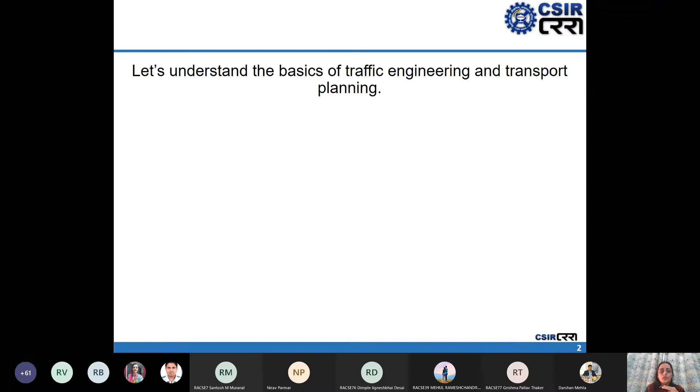When we say traffic engineering, we are talking more about roads, vehicles, how they move, geometry, and how it can be made safe, etc. When we talk about transport planning, we are talking at a larger zone, maybe at a city level, maybe an area level - what kind of planning should we do so that overall we move towards sustainability, we move towards safer commuting of people, persons, rather than vehicles.

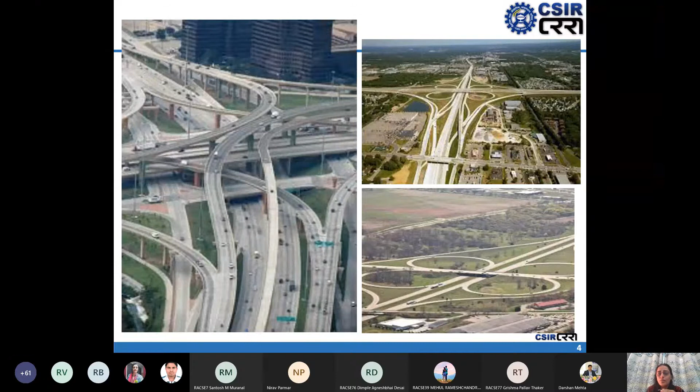But from the perspective of transportation planning, even by adding this much space, they have not resolved the problem. Still, these countries are having jams, traffic jams, congestion, and pollution. What we have here, they are also having similar problems. So definitely, space is not the constraint.

So sometimes we believe that the way we, being in India, park our cars or park any kind of vehicles here and there, that is the problem.

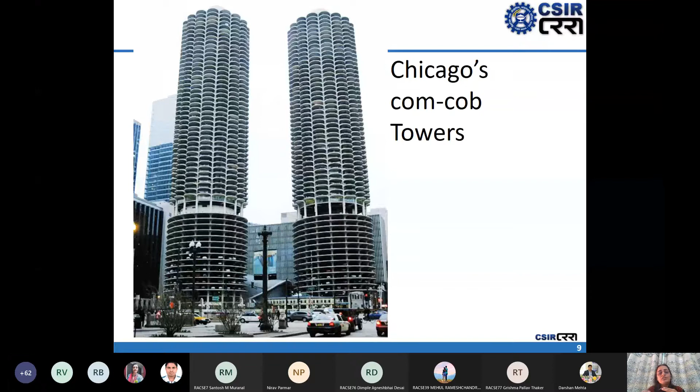Now just imagine if every person starts using space equivalent to a car. Suppose I am walking and I start consuming space equivalent to a car - do you think we have enough space for every person here? In Delhi, in India, or anywhere, whichever city we think of, just imagine how many people are using cars as of now. When we look at the road, we may see too many cars here and there, and we start believing that almost everyone has a car. But just try to consider it.

Just check out the data - being in this research field, we rely a lot on data. Half of the households do not own any vehicle, meaning they don't even own a two-wheeler. So only about half own, say, a car. Now even in a household that owns a car - and household means a family of typically 4 to 5 people - out of these 4 or 5, usually only one person is using that car, maybe for office, job, or work purposes. But the remaining 4 must be using some other modes.

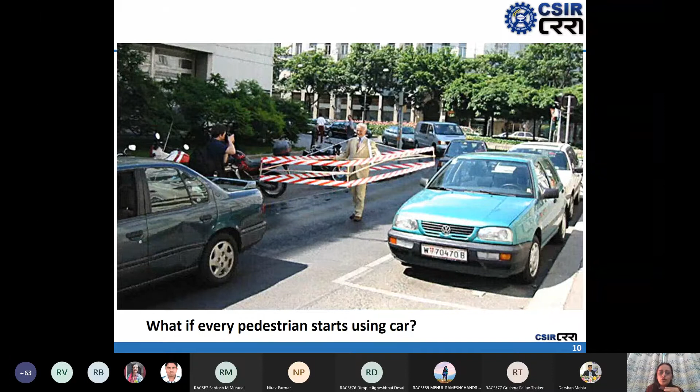So we need to understand, if everyone starts consuming this much space, what will happen? In that case, we will not have space for anything else. As of now, in Delhi, nearly one-third of the total area is basically utilized for vehicles - and that includes both roads and parking.

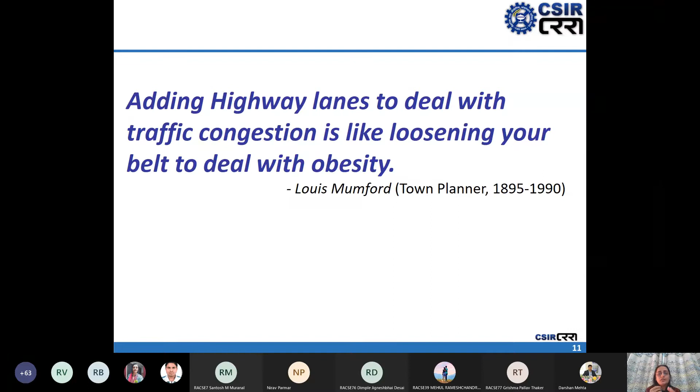So if I keep adding more and more space, since the number of cars keeps increasing every day, we may think we need to widen our roads. But if we keep widening our roads, what is the limit beyond which we cannot widen further? How much space would we like to give just for roads? If we keep adding space, accommodating more and more vehicles, it will cost a lot. We may have to reduce space from public spaces - parks, institutes, religious places - and it may even go up to encroaching on our houses, forcing us to build smaller houses. So we need to understand what the critical limit can be for allowing space to vehicles.

So what could be the sustainable solution? As of now, why is everyone willing to have a car? Because it is the most comfortable way of commuting from one place to another. But of course, everyone has to move, and they will keep moving.

At the same time, it improves the congestion level drastically, and it becomes more safe.

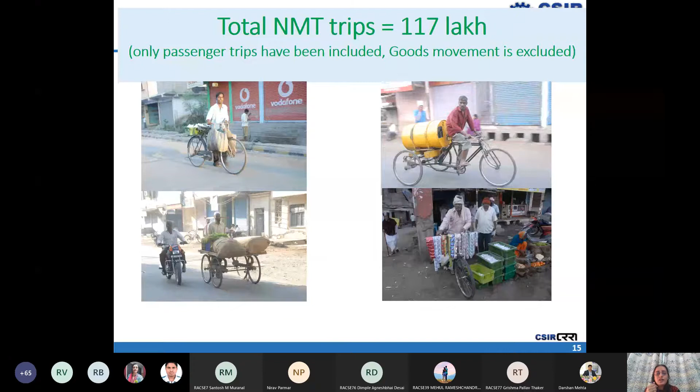If I talk about Delhi, since I have more data on it, pre-COVID, 90 lakh walking trips were made in Delhi, 11 lakh cycle trips were made, and Delhi also has cycle rickshaws, another non-motorized transport, accounting for nearly 17 lakh trips. If you combine all three together and compare with motorized modes like car, two-wheeler, bus and metro, these sustainable modes make up 50% of the total trips.

Yet what remains in the news, or in the mind of every planner, every engineer, every person involved in decision making in PWD, MCD, everywhere, is the car.

When we look at where these sustainable modes are on road, not just in Delhi but in almost every city in India, if you look at cyclists or the three-wheeled cycle lorry, which is also a sustainable mode, you'll hardly find them moving comfortably. They are pushed towards unclean areas, poor surfaces, sometimes the leftmost corner, which is unhealthy in every sense. This is not one particular road or stretch, it's common across almost every city in India.

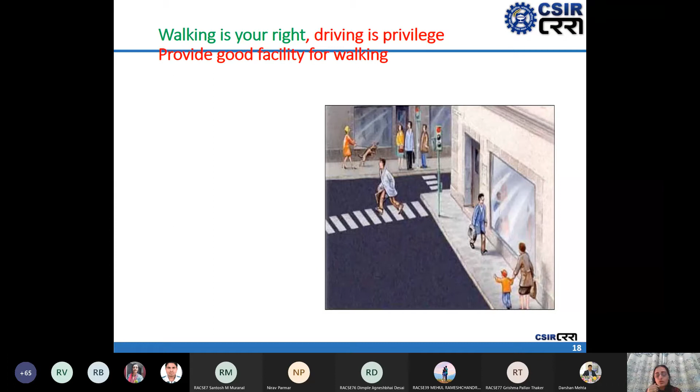Whoever is using bus today has a car in mind. They would like to purchase a two-wheeler if their income improves, and later a car if it improves even more. So whoever uses sustainable modes, walking, cycling, or bus, most are using them by compulsion, not by choice, because as of now the facilities don't support these modes.

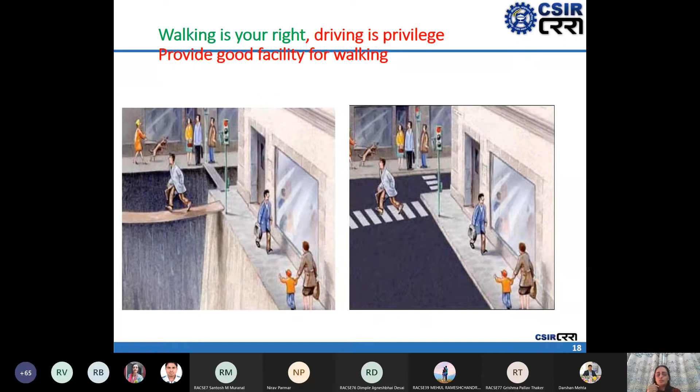They are walking with all this danger in mind. They feel unsafe, they know it is unsafe, but still they have to use it because they cannot afford a two-wheeler or car. So as soon as their income improves, they will definitely move toward motorized modes.

If we try to understand what kind of facilities we give as planners and engineers, whatever design we make to remove or reduce congestion, what do we do? We build foot-over bridges so that more cars can move easily. But when we provide a foot-over bridge, does it mean all pedestrians should go and cross there?

But in any city, if you look at these foot-over bridges, most of them are vacant, not used by pedestrians. What does that mean? We start blaming them, saying people just don't go up even though it's been built for them. But imagine yourself having to cross the road, what is the easiest and most convenient way? The most convenient way is to walk just on the road.

Now imagine if there's a signal and it turns green for pedestrians, that is the easiest way to cross, and everyone tries for that best way. If I have to use the foot-over bridge instead, I may need six times more energy and time. So whoever is violating the rule and not using the foot-over bridge, they are actually smart enough.

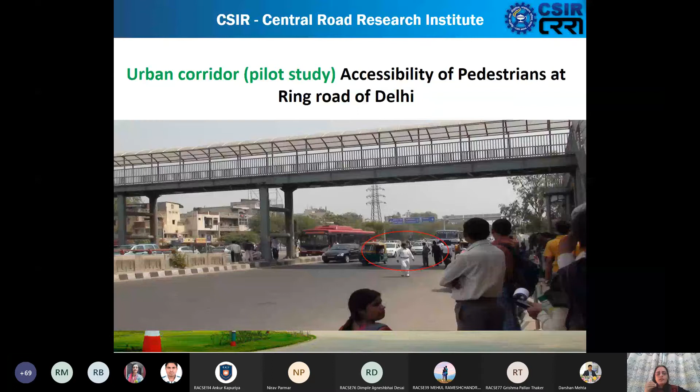When we are unable to provide clear, comfortable crossing facilities, these kinds of violations do happen. They jump over the fencing, or sometimes, most of the time, you might have seen even broken fencing on many roads, wherever it's possible, they break it.

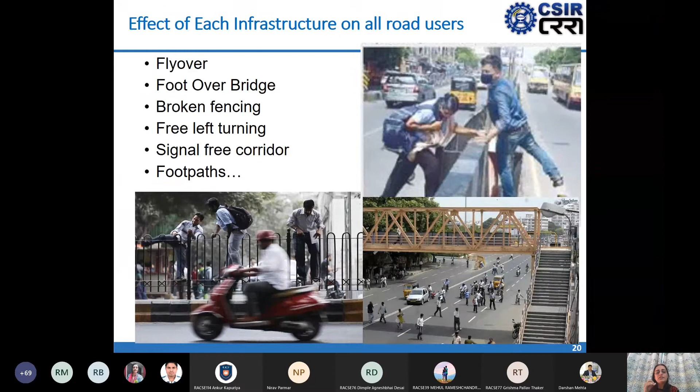When they do break it, some people may say, 'here, whatever you put, they break it.' But it is basically their voice, the voice of the pedestrian or all people moving there, saying that we needed some intersection here, we need some crossing facility here. That's the level of frustration they are showing by breaking it, yet we are still ignoring them and considering them as violators. But they need to put so much effort even while crossing, even if they have to jump through a wall or median or fencing, and still they are avoiding the foot-over bridge.

I'm giving an example. It can be a foot-over bridge, a flyover, an access controlled road, anything and everything. Each and every infrastructure needs to be checked - is it really in favor of sustainable modes or not? Because in theory we keep learning which are the sustainable modes. But when we try to implement a solution, somehow we all become focused on cars only. We all have cars in our mind and we start giving all kinds of solutions which are convenient for cars, and we simply miss providing facilities for almost everything else.

Another infrastructure is the footpath. Just imagine on any road when pedestrians walk on a footpath. We have done some study and observed there are only two reasons when a pedestrian walks on a footpath. The first reason is very obvious - if the footpath is too good, so nicely clean and decorated with plantation and all, definitely everyone would like to walk there. Most of us, whenever we go to tourist places, we observe this kind of walking. Second is, if the footpath is very dirty, very ugly, with dustbins and everything there, which is unfortunately very common, but still people are walking - then try to see the reason.

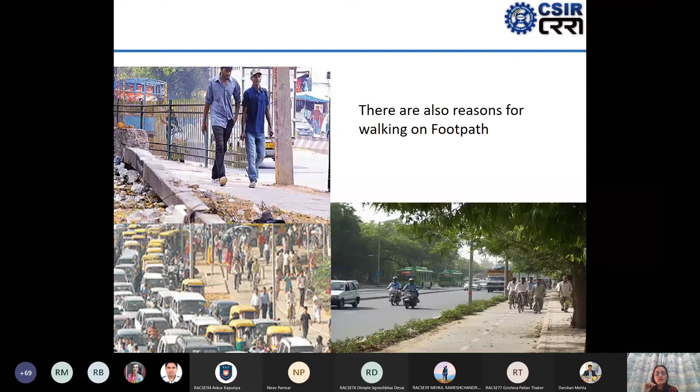The main road where vehicles are moving must be heavily congested, so congested that the pedestrian can't even think of walking there. And that's why, irrespective of the surface quality of the footpath, they will go on the footpath and try to walk there, because they are unable to walk on the road where vehicles are moving.

These are the common reasons when they don't walk on footpath. This is nothing special, nothing particular to this location. It is very common, and we can see it almost everywhere around our city or area. Either footpaths are encroached by many vehicles, cars, sometimes hawkers, otherwise it's so ugly we can't even think of walking there.

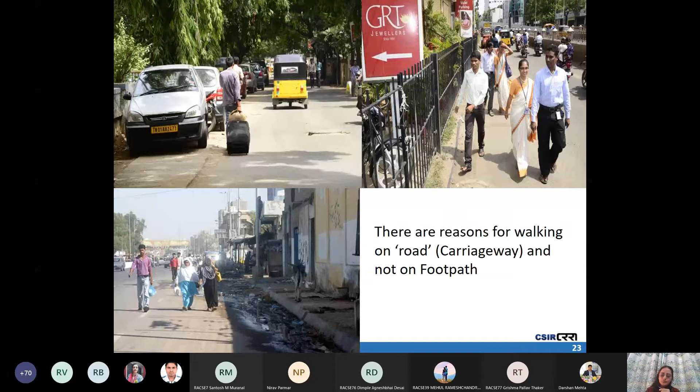Now in such a situation, what happens? When a pedestrian is not walking on footpath and walking on road instead, basically, even if we think for cars, just imagine, we are reducing the capacity of roads. The capacity of road is directly relevant to the width of road available for vehicles to move. Now if pedestrians start moving on road instead of footpath, we are reducing the capacity as well as the level of service for vehicles.

Now, then what is the solution? What should we do? There is only one solution: for each and every road which has a footpath, the quality of the footpath must be good, so that every person does walk on footpath and does not reduce the capacity of roads.

And when I say the footpath must be good, what I mean is, as of now, if you go to any road which has a footpath, the quality of the road surface is much better than the quality of the footpath. This is true for almost 90% of roads in India. So if I have two options while I walk, one is the footpath, whose surface is not so clean or good, and another is the road, where most of the time the quality is obviously better than the footpath, I will choose the better one. I will choose the road.

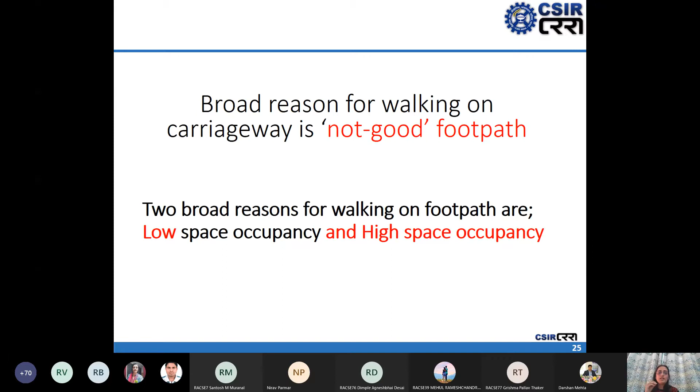So unless we have the footpath quality better than the road for walking, everyone is smart enough, and they will choose to walk on the road, which reduces the capacity of the road. And apart from that, when pedestrians are walking on the road, it creates an interaction between vehicle and pedestrian, creating conflicts and higher chances for accidents. So if we want to improve the safety as well as the capacity of roads, we need to provide better footpaths.

Now, whenever we talk about providing footpath or roads, as traffic engineers, what we have understood is that a road which allows the driver to drive at a very high speed, that highest speed, is basically level of service A. If you go a little down, maybe level of service B, C, and so on. So we have these curves in our textbooks. The higher the speed, the better it is considered, that is considered A, from the traffic engineering perspective.

But from the traffic safety perspective, what is our priority? From the traffic safety perspective, the lower the speed, the safer we are. This is very common and well proven. We all know that if I'm driving at a very fast speed and I hit even a stone, the chances of a fatal accident are high, compared to if I'm moving at a speed of 10 kilometers per hour. So this is totally opposite to the traffic engineering perspective, and that's why it becomes very important to balance these two.

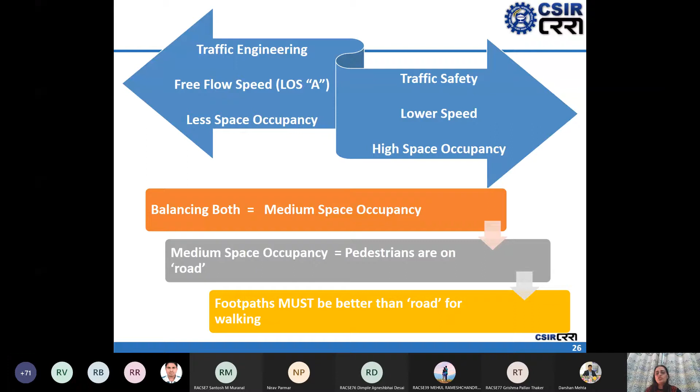If we have to balance these two, we need to separate them out. We need to provide good footpaths so that the capacity is okay and safety is also okay. This is the balance required, instead of giving priority only to the traffic engineering part, only to the level of service for vehicles. And this can be done very easily, basically by segregation. If we have, apart from footpaths, cycles and other non-motorized vehicles like cycle rickshaws in the case of Delhi, we need to provide a separate space for them. This is the very clear, easy idea to maintain the balance between the engineering and the safety part.

Now, after looking at these kind of slides, many people may raise a question that Delhi has wide roads, but not every city has. So providing a footpath and a cycle track, it's a luxury for roads which have this much space, and not for each and every road. We all agree, yes.

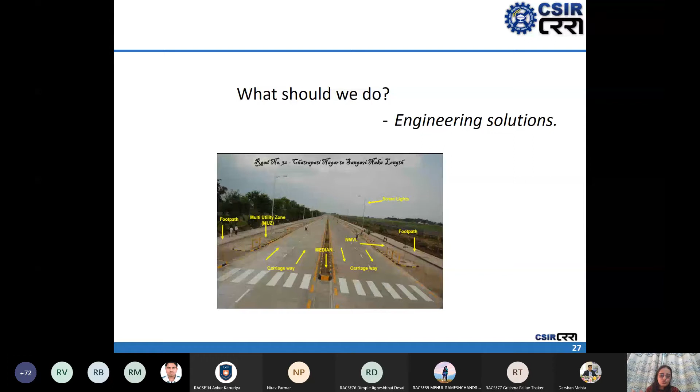So whenever we need to provide this much space, if we don't have space, we need to know what is our priority. When we start designing a road from the leftmost side, usually we do one car lane, then an overtaking lane, and then we don't have enough space, so we are not able to provide a cycle track or footpath. But if you have limited space, make sure you start designing from the edges. Provide footpath, maybe cycle track, and one car lane, or maybe say we don't have space so we are not able to provide a car lane. No need to sacrifice the facility for sustainable modes to give priority to cars. That's what I would like to convey.

So that's what the BRT concept says. It's okay to have a traffic jam for cars, but let the bus move faster, so the behavior starts changing -- the behavior in terms of the mode we choose to commute from A to B. But as of now, without BRT, car is moving at a quite higher speed compared to the bus. In that case, whoever is using the bus and moving from A to B would like to have a car so that he can also go faster. So we need to understand what is our priority -- if our priority is also sustainable modes, that is bus.

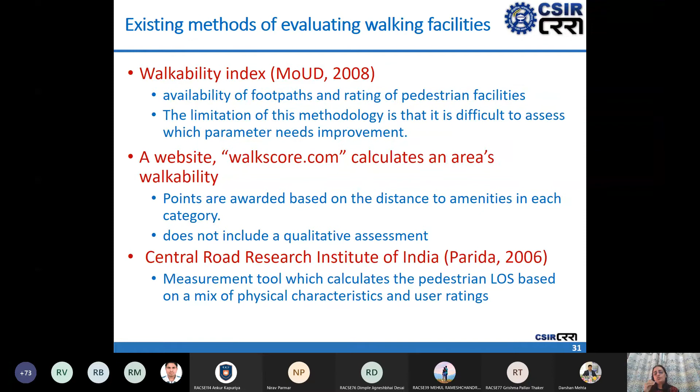Apart from just the footpath or level of service, there are other methods called walkability index that you can use to understand or estimate how good the walking facility is in a particular area. Walkability index is very well known - Walkscore.com is very well known. Apart from that, CRRI has also developed one method. I'm just giving an idea of what kind of methods you should choose, because if you choose the wrong method, again you will end up saying that we don't need those things.

So I will talk a little bit about the CRRI method. It includes how many obstructions you have. If a person is walking on a footpath, how do you evaluate how good or bad the footpath is. In simpler terms, if you are walking on any particular footpath, say for 1 kilometer, how many times you have to come down from the footpath.

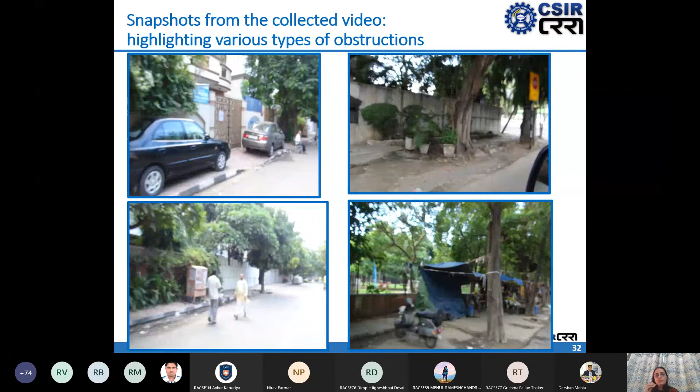Even if you decide to keep walking on a footpath, how many times do you have to come down because of obstructions? It can be a parked car, a manhole, some trees, or plantation by the community or household owners. Based on these kinds of obstructions, some are easy to remove, some are very difficult. We have given them weightage so that for a particular kilometer stretch of footpath, or even roads without footpaths, we have another method to calculate how good or bad the walking facility is.

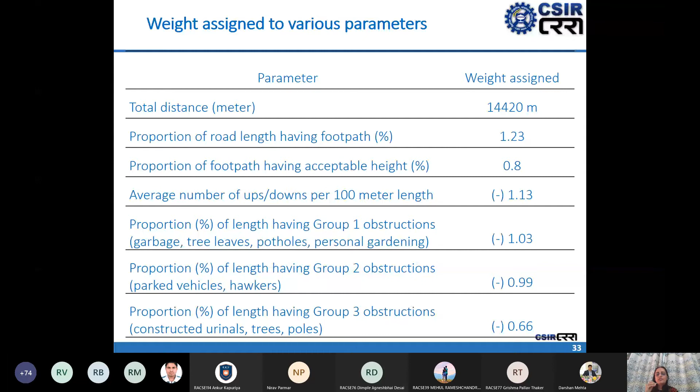This is what we did for some part of Delhi. These are just a few results, so we can suggest what kind of obstructions can be removed and how much improvement can be expected.

This is what we do for vehicles, but somehow we have missed doing these things for sustainable modes. In India, we have many roads without footpaths, but still so many people are walking. If you look at typical methods, we don't have any way to evaluate or understand the level of service for pedestrians walking on the road in the absence of a footpath. We don't have it.

So there is one method we have developed. It basically takes care of both. Suppose there is a road with a footpath that is not so good, not so bad, typically what we have on our roads. Few people will still walk on the footpath and few will walk on the road.

Now, if we check the level of service for pedestrians, it is usually the area available for pedestrians to walk. When we have a footpath on a road, what we do is calculate the level of service only for those walking on the footpath and ignore those walking on the road. So this is a method where we can consider them too, that out of 100% people, if 30% are walking on the road even though a footpath is available, then definitely the level of service is not so good. So this is the method.

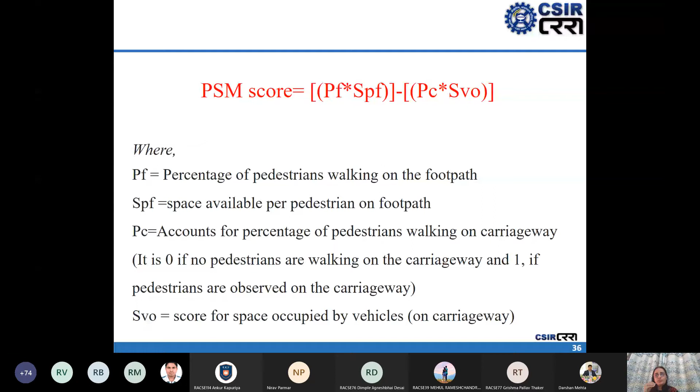I'm not going too much into the equations, but I'm just conveying the concept behind these methods, so that whoever is interested or teaching this further to students knows which method to convey, so that everyone puts better efforts into planning for sustainable modes.

Otherwise, it's been, I will say, high time, that people have kept building additional infrastructure space. Wherever we have congestion, we easily suggest flyovers. We easily suggest underpasses. So let's have a look at how that is reflecting.

In Delhi also, in the last two decades, more than 50 flyovers were added. And what is the result today? Even congestion is more. It's definitely not reduced, but increased rather.

So we need to know that whatever kind of mistakes we kept making over the decades, or since the evolution of motorized vehicles, we kept giving more and more space. And when we keep giving more and more space, basically we are inviting cars, saying please come, we have enough space for cars, so you can use it.

Like in Gujarat, if I talk about Gandhinagar, it has wide roads. Why would you not drive your car at the speed of 80? If there is a wide road with very little traffic, and you put a signboard saying drive at 40, I think most people would be violators, because the design itself allows you to drive at 80 or even sometimes 100 and 120.

If you really want to reduce speed, make a narrow road. Until you have enough traffic, make it narrow. Provide all traffic calming measures so that no one is able to drive at more than 40 kilometers per hour. Otherwise, wide open roads basically invite you to drive fast and engage in unsafe behavior. You all must be aware of the kind of accidents that happen on these kinds of roads.

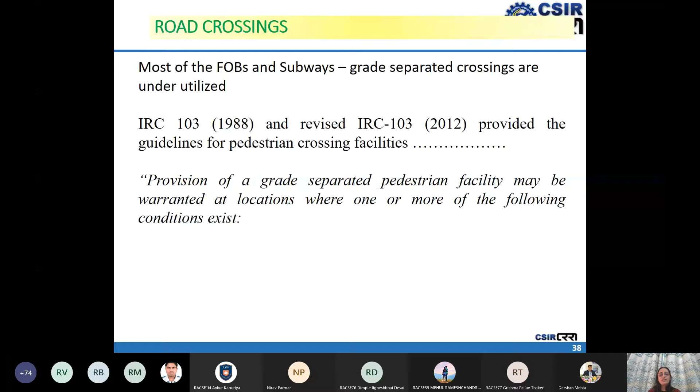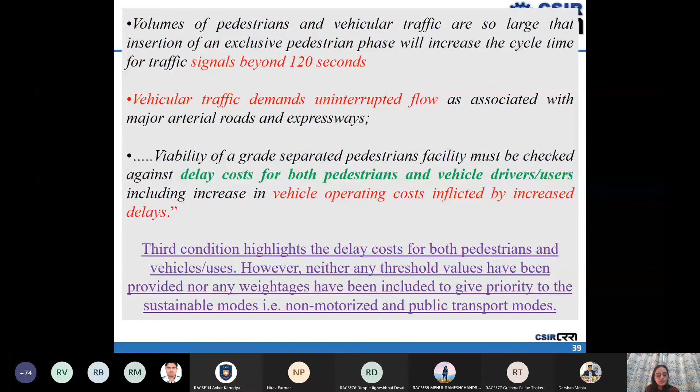Now, with respect to road crossing, though we have discussed that a signalized intersection is preferable for pedestrians, if you go by IRC guidelines, it includes, if you just read the green part, what is the delay? Whenever we talk about delay, what comes to our mind is basically delay to vehicles. Instead of delay to vehicles, we have to calculate the delay for both, the delay to all road users, irrespective of whether they are in a car or walking. I will just explain this chart.

Suppose there is a road where people in cars are going through, and another set of people are crossing the road. On a particular road, if there are too many cars and just 2 or 3 pedestrians cross once in a while, maybe three to five pedestrians in an hour, with too many cars, I suggest you can have a foot overbridge, because only a few people have to take this extra effort to cross the road.

But in case there is a road where vehicles are moving and at the same time too many pedestrians have to cross, for whatever reason—it could be an institutional area, a market area, or somewhere with heavy pedestrian crossing—usually we provide a foot overbridge so both get separated and traffic jams are reduced. But we suggest you should instead provide a signalized intersection there.

Why? Because if you provide a foot overbridge there, so many people have to cross the road by putting in so much extra effort. Compared to that, provide the facility to the maximum number of people by having a signalized intersection—let the car wait for some additional time, some delay.

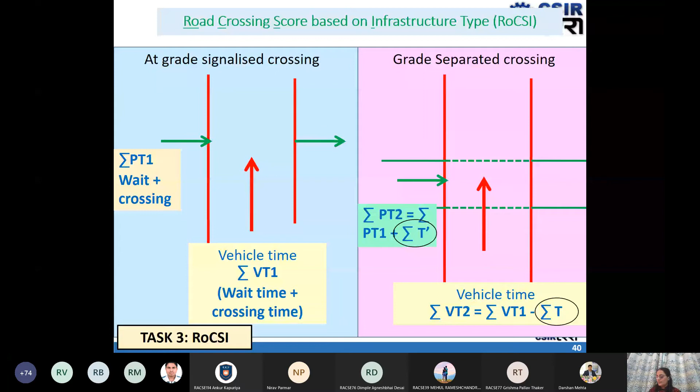Just 1 minute. If by chance you find that I'm going very fast, let me know, because I'm keeping track of the time as well.

Now, usually what we do, being a student—also what we have done—is whenever we calculate the level of service, we use the HCM, the Highway Capacity Manual. Sometimes we use the IRC code, the Indian Roads Congress codes. Using one particular method is all right, but unknowingly, many times for vehicle level of service, we have used the Highway Capacity Manual in the blue table.

Just imagine if there is a delay of 36 seconds—36-second delays fall in the category of D. This is for vehicles, say a car. So if a person in a car has to wait for 36 seconds, the level of service for him is D. Now look at the yellow table.

This is for pedestrians, but based on some other guideline—it's for IRC. Now IRC gives these values. If a pedestrian has to wait for the same amount of time, that is 36 seconds, it will fall into category C, level of service C.

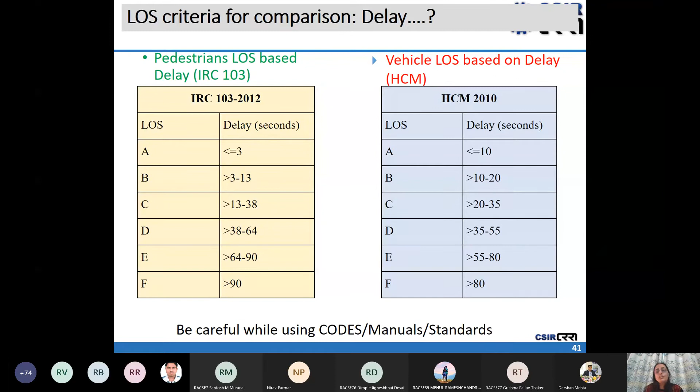So we need to understand if we are using any method, is it really making sense or not? That's what I'm trying to say. There are many methods—whatever method you choose, for teaching or even for implementation projects, do make sure it favors sustainable transport, or at least does not take it otherwise. It should not give any priority to cars.

Now, if I talk a little bit about road safety in India, since traffic engineering has a lot to do with the safety aspect, we need to understand what we would like to provide. Just try to understand.

At many places, many forums, many agencies share and feel proud that we are building 20 kilometers of roads in a day, and that's progress. Yes, that is progress, but I will say it is only from the management's perspective.

But if we talk about traffic engineering and transportation planning, what we are worried about is the increasing accidents. The road length has increased by nearly 40%, providing more space, but the number of motor vehicles has increased more than 150%. So are we really going in the right direction or not?

We must check it. Our national highways are very few compared to the total road network, hardly 2%. But most of the accidents are happening there, one-third of the accidents are on national highways. So we need to think about what is wrong with our national highways that is creating these many accidents.

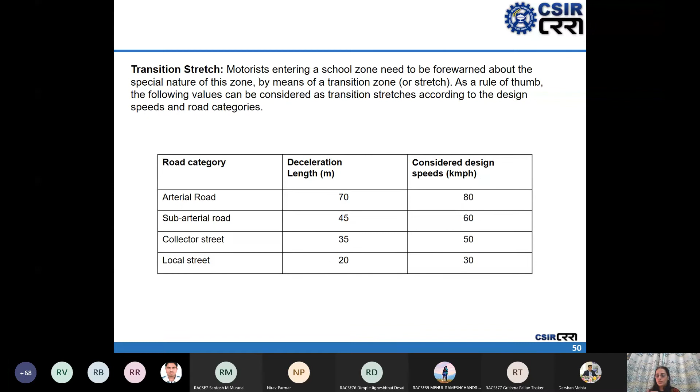Apart from this, once a school zone is defined, we consider it a transition stretch. Suppose there is an expressway—unfortunately we have schools on highways and even expressways. So if someone is moving on a highway, some transition stretch is to be given to the driver so he can slow down. Wherever we have to make an area safer, we need to make everyone slow down. This transition stretch will be there for some length, a deceleration length, so they have enough time and length of road to slow down instead of making a very sudden change.

The principle is basically we have to reduce the conflict points between children and all the road users, and we need to separate them out, and we definitely have to manage the speed differences. In a school area, we are keeping a child as the least responsible, or not at all responsible, because if something goes wrong around a school where children are moving here and there, we should never think that we should teach everything to a child, how to move, how to cross the road.

Because if children of even 5, 6, 7 years, you may see a child moving very calmly with you, even holding your hand, and all of a sudden something very interesting comes up, like a kite or balloon, he may leave the held hand and run. This is a child behavior.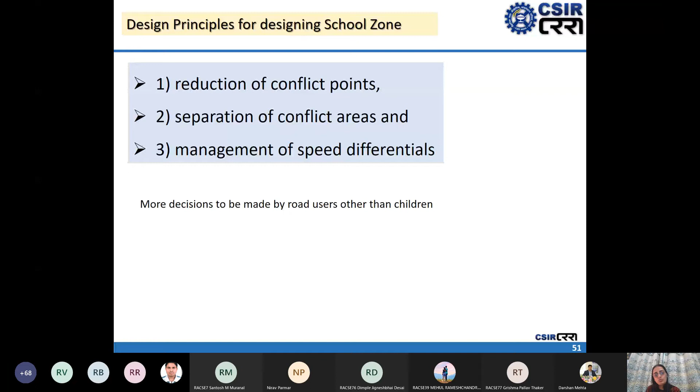Accepting this child behavior, we should design our roads so that even if a child makes a so-called error - I mean, being a child it's not an error, but for us it may be considered unsafe behavior - others should be able to reduce speed and keep him safe. I don't mean children should move anywhere they want, but in case they do, instead of blaming them, we need to make a kind of supportive infrastructure in every form.

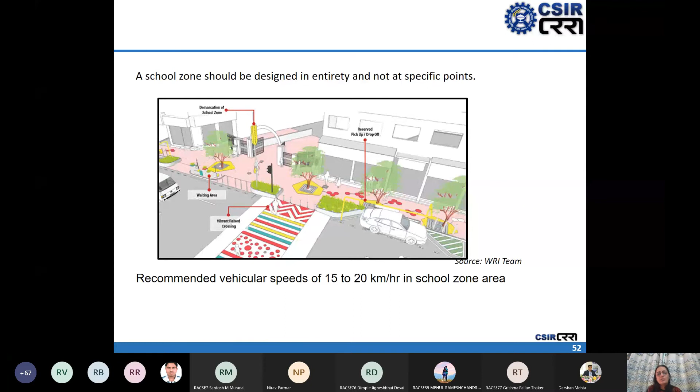This is just an example. These kinds of examples we are adding into this document, how you can highlight this school zone. It should be colorful, so that it conveys a message that it is something for children. Also, it depends where the school location is - the orientation of the school is such that gates open on the major roads, on both sides or one side.

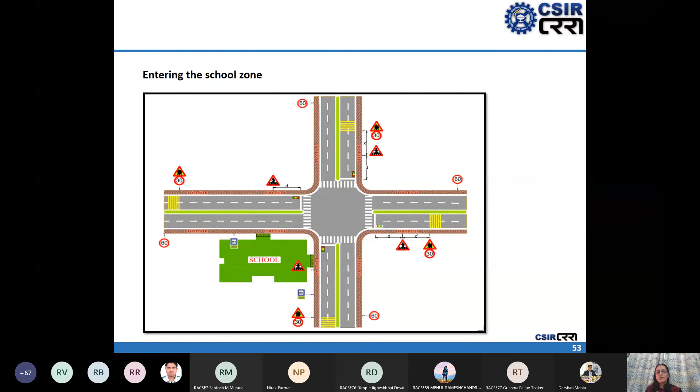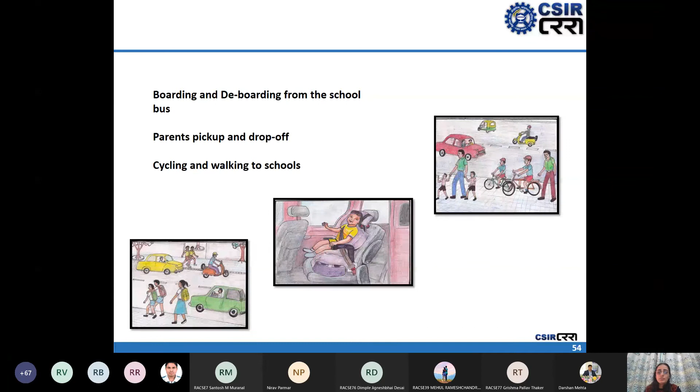This is just one example, we have included all kinds of things. And lastly, a few interesting drawings to convey the message to children. But this is the last part, and we are not at all reliant or dependent on these things, because though we are conveying some messages to children, while designing a road we are expecting they will make mistakes or go the other way.

So I always say, if a child is dying due to a road crash, it's a failure of all what we are doing in form of engineering, education, or even enforcement. So being in this profession, if we are anywhere involved in traffic safety of children, or even in an institute with younger students, we need to make sure they are safe, because this is the age where unsafe behavior may happen.

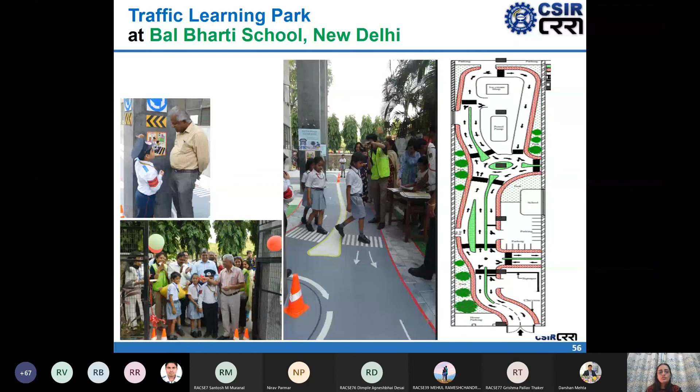This is the last slide I will say. This is what we did - we developed some kind of small traffic parks, to just teach what is right and wrong. But we are definitely not much into teaching children directly. I think I will stop here. Time is this much, so the next part I have, but I think I will leave it.

With respect to closing remarks, we need to know our priority. If our priority is NMT or the sustainable modes, definitely we have enough space. And in a particular area, who's the priority? If it's a highway, the priority is trucks and cars. Definitely around school areas, the priority is children. So even our designs must reflect who's on priority. That's what I would like to say. Professor Mehta, I will stop here.

Still we have 15 minutes. If you want to continue, then you can. Okay, okay, I hope all are awake.

So I'll quickly go through a small project we had recently. In Delhi, we have metro and metro stations. Now around every metro station we are facing congestion, almost everywhere apart from a very few which are towards the outskirts of the city. And whenever we have congestion, even implementing agencies approach us saying, kindly give some solution.

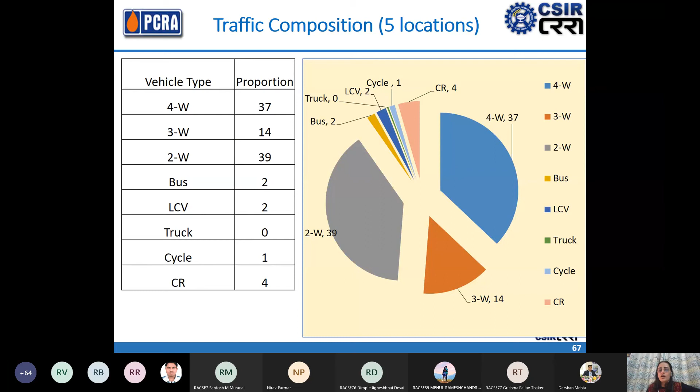I will quickly go through this - this is just the modal split, what and how many kinds of two-wheelers we have and three-wheelers we have, and so on.

Now, the interesting part is, because this is a metro station, whoever is coming to the metro station is coming by some mode. We have observed that 40% are coming by walk, 35% are coming by all kinds of rickshaws - shared rickshaw, cycle rickshaw, auto rickshaw, and so on. 14% are coming by car. This car can be a private car, someone dropping their spouse or children or anyone, and some are coming by app-based taxi like Uber and Ola. And 8% are coming by bus and the remaining 4% by two-wheeler.

Now the main thing is, the majority - more than 70% - are coming by two modes: walk and rickshaw. But we have ignored them. We have not given any facilities to them. If we don't take care of these two major modes, as we discussed in the initial slides, they will think that as soon as I earn some money, I will buy a car and move by that, because we are not having any facilities for them.

But at the same metro stations, around the metro stations, we provide car parking. When we provide car parking, it's basically benefiting someone, but that's proportionately quite less. Even out of this 14% who are coming to the metro station by car or taxi, half of them are coming by Uber and Ola, basically taxis. Only 7% are parking their car and using metro. But for them, we have a huge car parking area. Now, can't we think of removing or reducing the car parking so that we have better circulation plans for the rickshaw users and walkers, who are the majority but need quite a less space? So that's what we focused on.

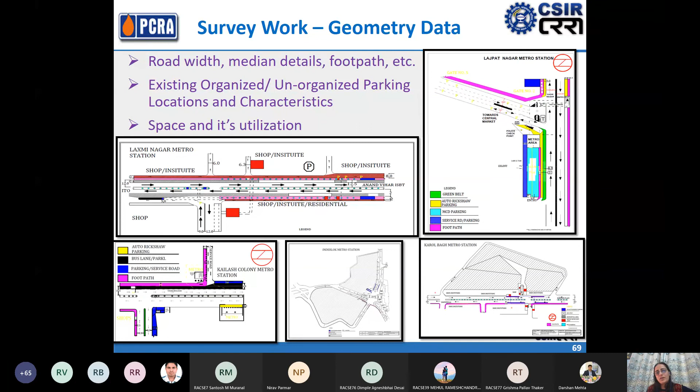So what we did, we looked at every stretch of road very carefully. This is definitely a wide road. Now, can you think that this is such a wide road? Is there any reason for having congestion here? If even such a wide road has congestion, then we can't just double it, we can't keep adding space. So we redesigned the complete space, every inch of it, so that we could accommodate almost everyone. And that's what we did.

I will show you a few more places we looked at. Like this space, it's just underneath this foot-over bridge and the pillar of the metro station. This was totally unorganized. We totally redesigned that and made it a cycle rickshaw parking, in a circular movement, so that as soon as the metro user comes out, they would have access to the rickshaw and could immediately move on. Otherwise, these rickshaws were standing on the main road, creating congestion, and metro users coming out also felt unsafe.

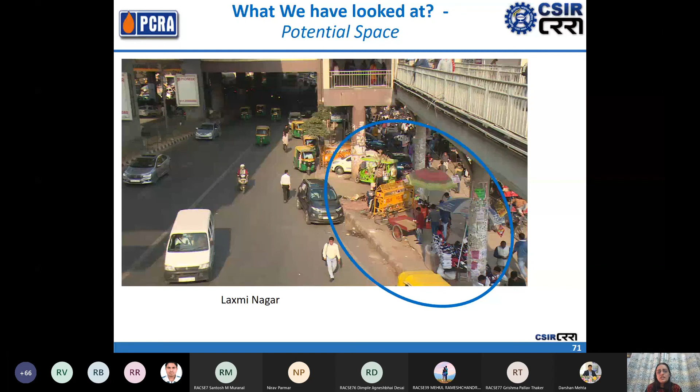So if we look at the space very carefully, we need to know what can be removed and what can be improved. Only 3 cars parked here every day, and at another location only 3 to 4 cars parked every day. It belongs to some important people, I understand. But by removing these 4 cars, we could accommodate 20 cycle rickshaw people here. And that is definitely a huge benefit for all who are coming to use the metro.

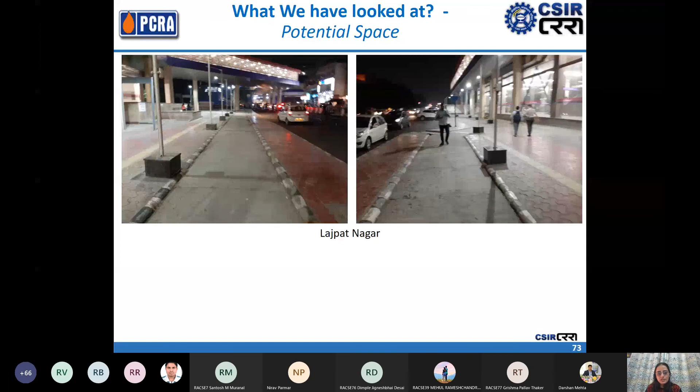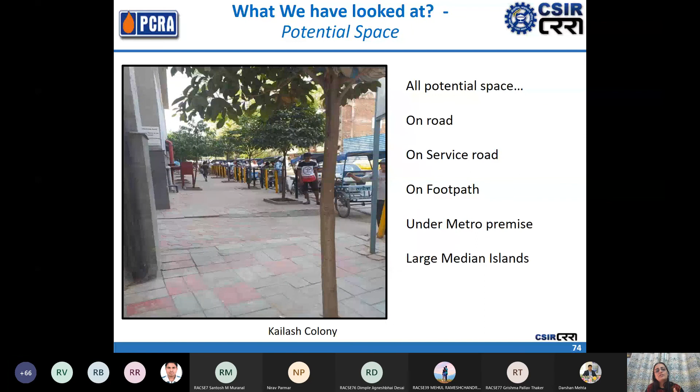So what we did is, for every location, we looked at what the space is and whether it's being utilized for the right person or not. When I say right person, I mean sustainable modes. So we cleared enough space to have an organized, very safe path for almost all sustainable users, and at the same time we reduced congestion in all these areas around metro stations. And this was just part of it.

We asked all users what they would like to have before giving a solution. Everyone, most of them, said they need a clear path. They would like to have a clear green signal for them, so that they can cross the road.

Otherwise, most of the time we design the signal cycle according to traffic, and when I say traffic, unfortunately, we mean only motorized traffic. We ignore the green time required for pedestrians. If someone has to cross the road, we should know at what speed a pedestrian walks comfortably without running. So depending on the width of the road, we need to design how much green time is to be given for pedestrians to cross. But unfortunately, all our designs are based on vehicles. So for each and every small detail, we looked and provided a solution.

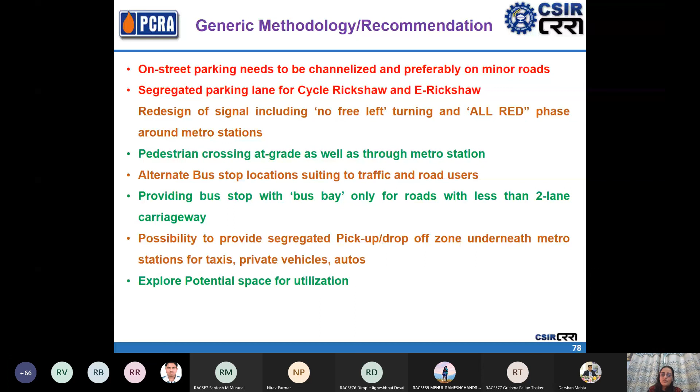We were very happy because we could balance this. Otherwise, all the burden was on the shoulder of pedestrians because of cars. So we could give better facilities to pedestrians, and at the same time we improved the capacity of roads by making many minor corrections. There were too many minor corrections, but all were minor. Without adding space, we just redesigned the space and achieved significant improvement.

And that's what should be done at the very first point. Otherwise, if we start adding space, basically we are postponing the problem. We are just shifting the problem for a couple of years, or maybe some more in terms of space, but the problem will come back and we will need to resolve it again.

Apart from that, it brings new problems, like pollution. Delhi has a major problem of pollution. But if we follow the same trend Delhi did in terms of adding space, I think almost every city will reach that extent. So we better rethink what is to be done, what is to be given priority. I think I will stop here.